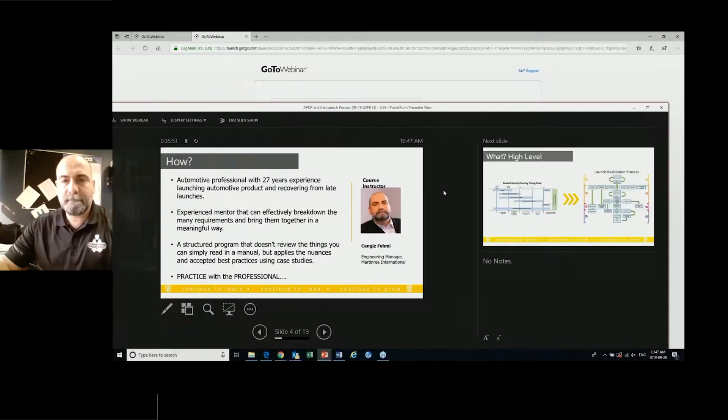Okay, so and then you must have missed this then.

So to give a high level of what we're talking about here, if you look at the left-hand side of the screen, that is the standard product quality planning timing chart that is dictated by the APQP manual or the guideline. That is what you'll learn in any subject that you take by a third party. However, that is not what the OEMs actually use or the suppliers to OEMs use. They've taken that and they've all modified that into their version of a gate and phase review process. So we will learn how to break down the product quality planning timing chart and how it's actually applied by the largest of the suppliers to the OEM industry, whether it's Martinrea or any of its competitors. They all use a similar process.

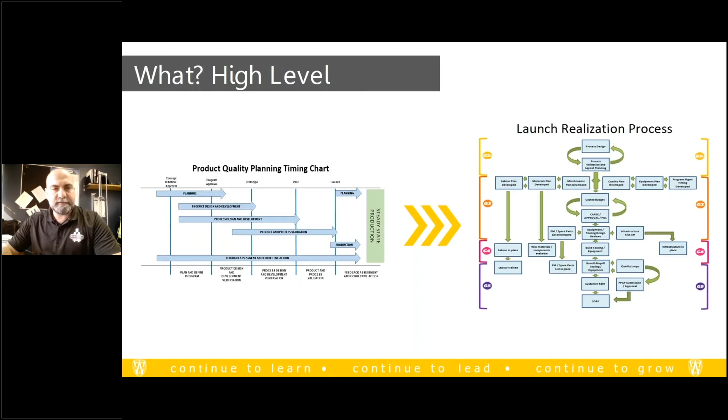So we will review gate and phase review, the different points at which deliverables become relevant and important, and that helps you to streamline. We'll teach you through this course what needs to be done at what stage of timing so that you're not running around trying to solve all problems at once, but only the relevant problems when they need to be solved.

So we've made reference to the AIAG reference manuals. That is the core for all of APQP. Those reference manuals are the backbone and the structure. But again, we won't be using those as our primary teaching tool. We'll only be using those as reference material. Instead, we'll be breaking down and using those materials to actually apply lessons learned. So that if you're asked a question or you're in a situation where you're applying APQP, as a quality engineer, a manufacturing engineer, a process engineer, an industrial engineer, you'll be able to actually give specific examples of how a particular core tool is used.

We'll define roles and responsibilities. That's very key. I'll repeat that over and over again because if you know who the right resource is to conduct a particular deliverable, then you will save time trying to figure it out in the real world. Planning and management tools. Management has key responsibilities for APQP. We will discuss what individual resources are responsible for, but what the management team is responsible for as well. And it's key to make that divide because ultimately the management team is responsible for the success of any launch activity.

We will develop process flow from scratch. We will use real-life examples and develop a risk-assessed process flow and cell design. We will drive that into an actual risk assessment tool. We will apply core tools for designing our quality control system, which is the final output of APQP. We will learn to understand that data. We will learn to look for bias in that data.

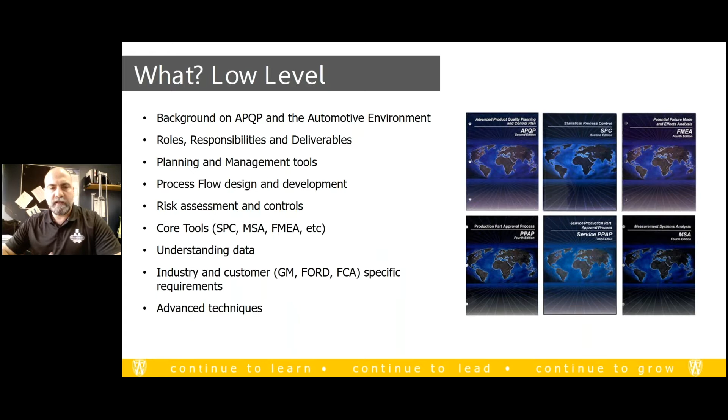When your vehicle stops at a stoplight, this pump initiates fluid into your transmission to keep it lubricated so that when your engine starts again, when you leave a red light, your transmission is well lubricated and it's a smooth transition. So this function is shared by both Ford and General Motors on a common transmission on a high volume product, and this was built by one of the suppliers. This had to follow an APQP structure. No negotiation. They were required to work with both Ford's customer-specific requirements and General Motors' customer-specific requirements. So this is one of the example topics we'll go through.

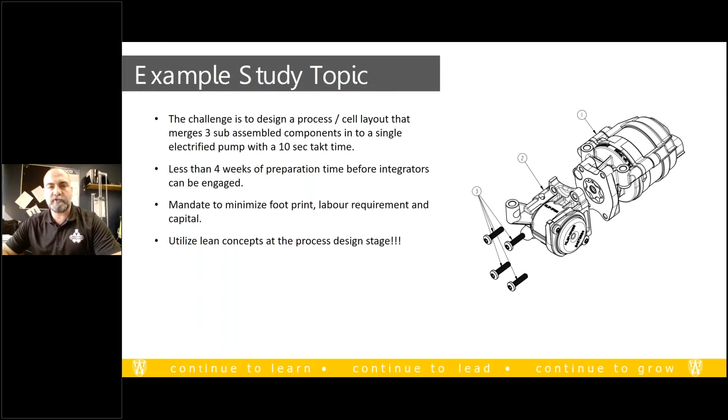And any supplier you work with will be utilizing lean concepts. So we throw in all the lean concepts at the process design stage. If you are designing a process, it's best to apply your lean lessons at the beginning and not after your capital money has been spent. It's more expensive to correct equipment than it is to design it correctly in the first place. So part of the 100-hour course is doing that from scratch on a simple example, then a more complicated example. So we will be going through actual case studies. And then for your project, you will do that yourself on your own case study.

We go through the lean principles. You may have heard plan, do, check, act, but we understand how that relates to the continuous improvement function, what that means to IATF 16949 certification, which is the standard for quality certification within the organizations that supply the OEMs, and how to actually apply that, not as just a philosophy, but as a real-life tool to use every day in your job. Not only is it a philosophy, it is a requirement. You will be challenged in your job in the automotive sector continually to find improvement for many different things, and we'll talk about that in a moment here.

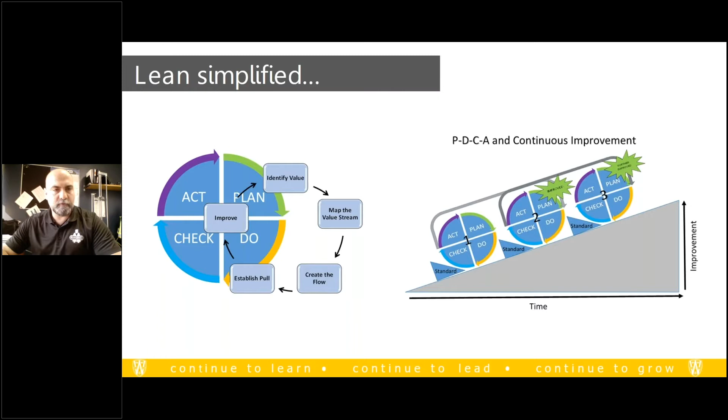We understand from our basic lean lessons that the 7 wastes or 8 wastes, depending on how you break it down, are what we're trying to eliminate. But there are tools for achieving that, and those aren't always discussed. Those advanced tools, we'll be going into discussion on those. But just a quick reminder for those of you who've taken your lean class, we're always trying to eliminate transport, inventory, motion, waiting, overproduction, overprocessing, defects, and most importantly, wasted human talent or human potential.

If you take a generic third-party course on APQP, they will not get into specific examples for the automotive industry. They'll keep it fairly general so that they can teach it to a broad scope of individuals. And this is so that they can keep seminars to 1 or 2, maybe 3 days.

In this course, we actually break it down and use examples from all the key process elements that suppliers have, whether it's joining, which includes welding and adhesive application, machining, which is material removal, forming, casting, molding, which also includes powdered metal technology and additive technology. We will use examples from all the major processing types and not keep it generic. We will get into very specific examples.

So if you already have exposure to an industry or you are considering an industry, the examples we will use will help to shape your understanding of APQP for those industries or shape your expectations of what you will see in the automotive sector if you have not been exposed yet, at a true and accurate level as opposed to a generic level.

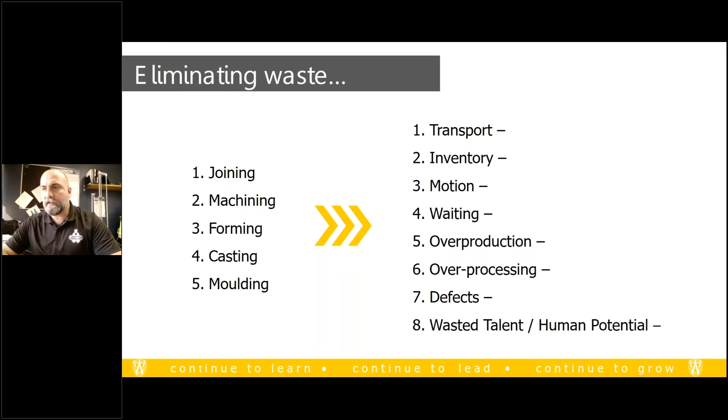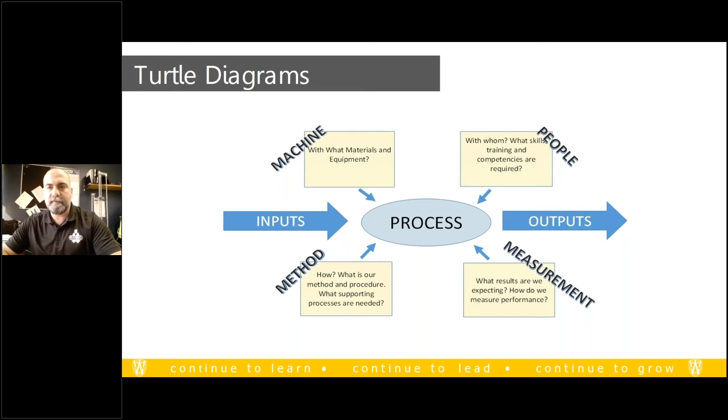One of the tools that we'll discuss are Turtle diagrams, and we'll use those exclusively for determining inputs and outputs. It's a basic tool, it's a standard tool, it's outlined by the AIAG format, it's a requirement in IATF 16949. So we use this tool. Eventually, you'll be able to develop inputs and outputs automatically, but this tool helps us to develop that thought process. And here's a quick example.

If we look at the process of gauge calibration, and we look at what equipment's required, what methods required, what triggers the process calibration, what are the people, the resources required to do that process, and how do we determine the effectiveness or validity of that program through our measurement, then we have an output that we can actually rely on.

And if we have an issue and we need to look for sources of variation to eliminate problems, we can now break it down. This is no different from Ishikawa. This is no different from our lean classes, but this is applying real life examples over and over again until this thought process becomes automatic and we become proficient at problem solving using basics.

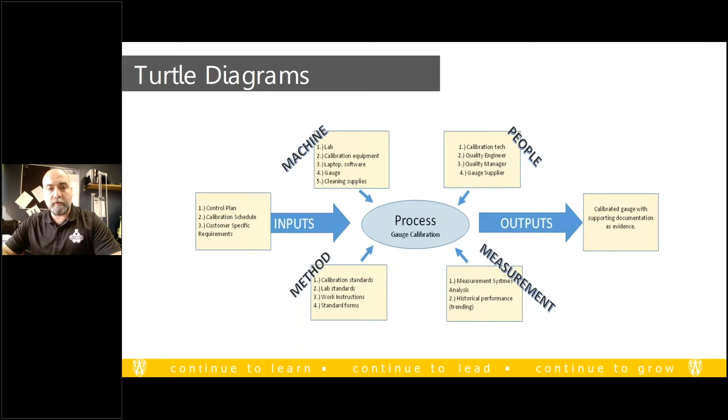We originally got the cross-functional team together on the example of this motor, this pump for the 10-speed transmission that both Ford and GM use. And originally what we came up with was just over 1,000 square feet utilizing 8 operators. And this is how we believe we can get that 10-second takt time. However, by looking at the design, most of you who've taken a lean class will say that's not a lean cell, and that is true. We identified concepts that were not lean.

For instance, in lean, we don't want islands, we don't want to walk around things, and we want to minimize how many branches or legs are in our cell so that we can flex up and down as volume requirements change. If the volume goes up, I should be able to add additional bodies, and they shouldn't be bumping into each other. If the volume goes down, or we're in ramp-up phase where the volume is lower, I should be able to reduce the labor count, and they should be able to slide from cell to cell quite easily without having to walk around big islands within the cell.

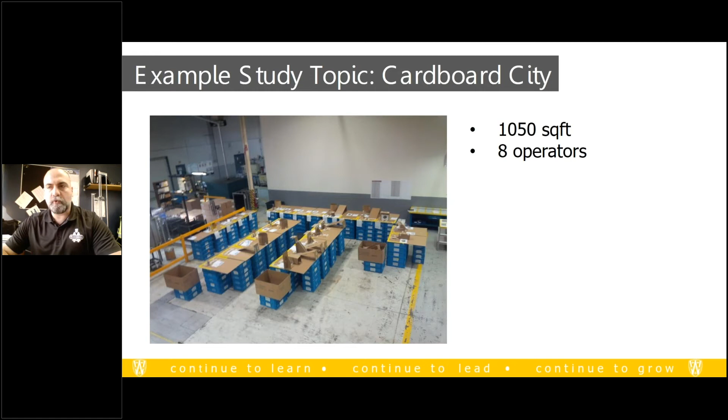So we got the cross-functional team together, our lean experts, our quality experts, our production experts, our operators, and we came up with a second iteration. We dropped it down from just over 1,000 square feet to just under 800 square feet, still with 8 operators, but now we've incorporated all the lean tools and exercises and tricks. So in the 100-hour course, we'll be reviewing those tricks and going into great detail.

How do we go from just over 1,000 square feet to just under 800 square feet? And what tools and assessment tools we used here. And the one key tool here is charades. We actually had operators mock assemble product within this cell. This is just cardboard and totes, nothing expensive. This is a little bit of time to put it together, but we put it together with a cross-functional team. It took us a day to set this up and a day to review it.

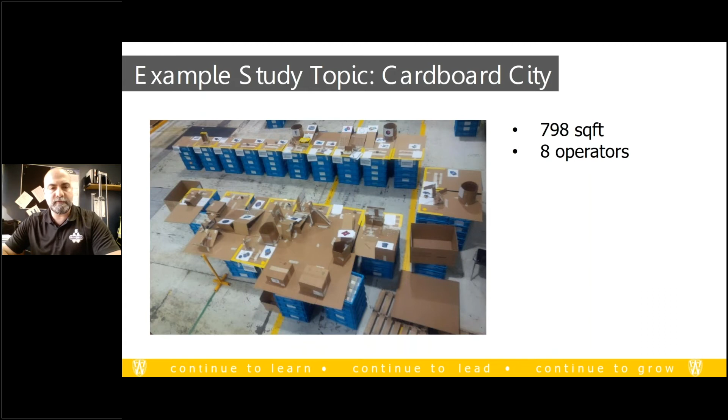Once we did this and we got our charades done, our mock assembly times, we were able to develop combination tables, which you may have learned about, and if you didn't, we will be learning how to put together combination tables. And that gave us an opportunity to come up with our first CAD version of this design, which dropped our footprint even more to 570 square feet. But when we did the charades, we also identified that we could do the 10-second takt time with only 5 operators. By applying those combination tables, we had a very clear understanding before a single dollar was spent and a single integrator was engaged on what we wanted and what was feasible.

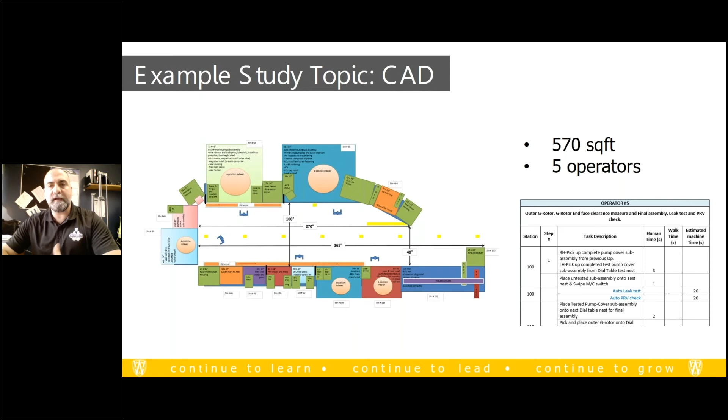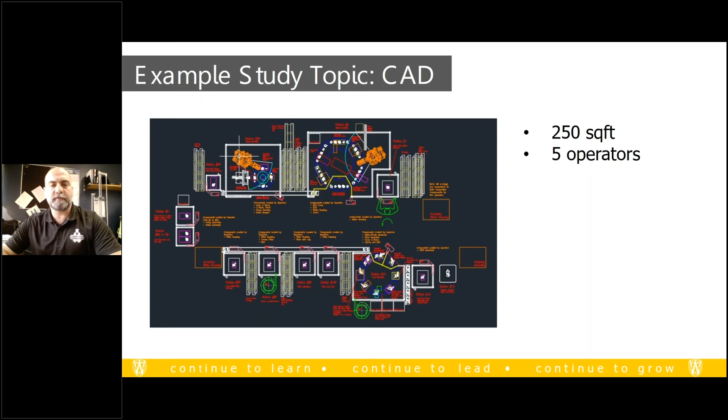We will own the process. As a supplier, you own the process, not the people building your equipment, you. And how do you get ahead of the challenges and hurdles? By understanding your process. So by providing this to our integrators, we came back with a proper layout developed by the experts, our integrators, and we further reduced the footprint to 250 square feet, still with 5 operators at full volume. So all in all, in less than 4 weeks, we went from 1,050 square feet and 8 operators down to 250 square feet with 5 operators.

At that point, we quoted the product, the process to make the product, and we were, within 4 weeks, very clear on what our process was going to be and where our money was going to be spent and how much money was going to be spent against a budget. And it's very difficult to defend your position on the equipment you want when you don't have this legwork. You'll find that in industry, there's always a push for less money to be spent and less people to be used. If you use these methods and tools to develop your process, you already have your evidence in front of you to prevent challenges and to speed up the process of launching your process design.

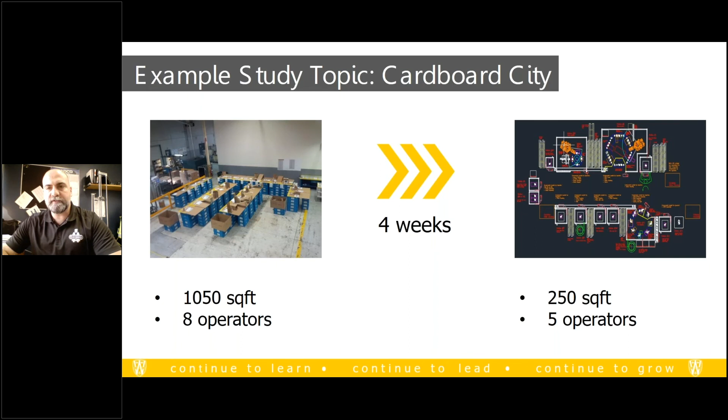So this is an example study topic for the course. If you can imagine what we just discussed here in a few minutes, the course itself is 100 hours of this kind of material, specific examples, utilizing our reference material, real life examples, real forms and processes, and the interactive ability to answer questions as we develop. It will be broken down into weekly segments with takeaway homework, and we will have it broken down into six sessions in this year and then 6 sessions in the new year. I'm going to pass the microphone over to our friends at the other end to help discuss registration information, and then we can get into some question and answer after that.

Thank you. Yes, so class will be held on Saturdays from 9 until 5, starting on October 19th. There will be a break in December, so the last class will be November 23rd, and classes will start back up January 4th, and again every Saturday until February 8th. There will be a product launch competition where you will be put in a small team, and we'll have industry experts come and provide you with feedback regarding your product launch presentation. So there will be a panel of judges, and the classes will be held at Windsor Hall downtown campus.

The cost is $995 plus HST, and that's for both sessions from the fall and the winter. And it'll include all of the materials. And you can register at continue.uwindsor.ca. We do have a new registration system, and you can pay through credit card. You can use your existing login, UWin ID and password on the left side of the screen. And we have a lot of interest, so please register soon, as we do expect spots to fill very quickly.